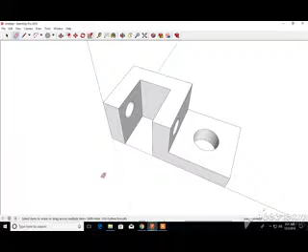So getting started with a new file here. We zoom in and are going to create a rectangle.

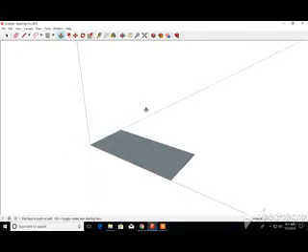The rectangle is going to be 3.75 by 1.75. There's the basic dimensions of it here. We need to give it some height, 1.5. And so there's the cube.

Now I'm going to start over here on the left-hand side. There's this U-shaped channel. The first thing I need to know is how far this distance to the edge is from the left, and I see it's 1, 2, 3, 4 halves, which is 2 inches. And I see each leg of the U-shape is a 1/2 inch.

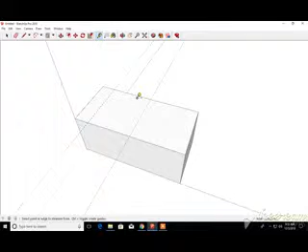So starting the tape measure tool, over 2 inches. Each leg of the U is a 1/2 inch. I'm going to take a rectangle, and I'm going to push-pull this to subtract it away.

Now, before I get too much further here, I need to take a look at the base pad. I need to note its thickness here. It's a 1/2 inch thick.

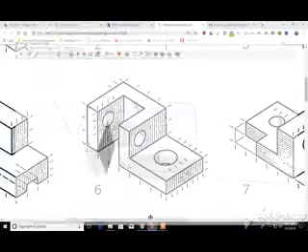So I'm going to go back to my modeler. I'm going to take the tape measure tool and drag this up a 1/2 inch. Now I'm going to divide this face here, and push-pull this downward to this line right here. It should be a 1/2 inch thick.

So there's the basic shape of the object. Now what we have to do is start putting the holes in. The holes follow a very similar pattern to what some of our other shapes are. We can see that it's a 1/4 inch from each edge, so that means the hole center is a 1/2 inch in.

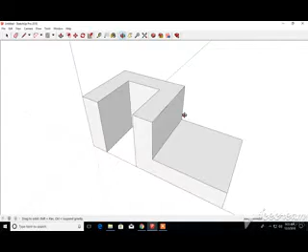So I'm going to take a guideline tool once again, measure in a 1/2 inch, and do the same from the front edge toward the back. Then right where those intersect there, I'm going to create a circle that's exactly a 1/2 inch in diameter, so 0.25 radius. Alright, we're going to do a little different technique here.

We're going to copy this. So I'm going to take the select tool, select the circle, and click the move tool. Once I click the move tool, watch the cursor up here in the corner. I'm going to click the control key with my finger and see how the little plus sign appears.

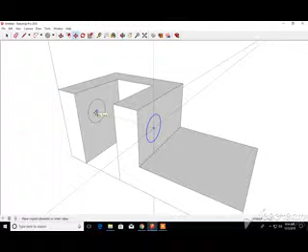That tells me it's going to copy. So now I'm going to give a reference point for the copy by clicking in the center of the circle and then moving it over to this edge here. Note the red axis line tells me it's exactly in the same position, and I give it one last click. Now once I have that, I can go ahead and subtract these circles away just like I would normally. So that's just a little time saver right there.

Alright, clean up the guidelines. Now the other hole in the base pad is 3/4 of an inch in diameter and it's centered. I know this because I could just do the math on this, and I see that it's centered on this surface.

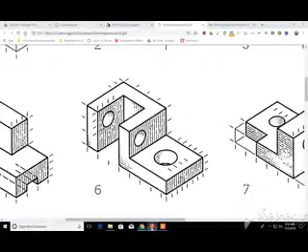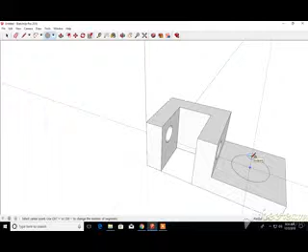So I think what I'll do is just go ahead and take the guideline here and measure over to the midpoint, and do the same thing here. Then right where that intersects, I'm going to create a circle, and the circle's radius is going to be 0.375, because half of 3/4 of an inch is 3/8 of an inch, which is 0.375. And then I'm just going to subtract it.

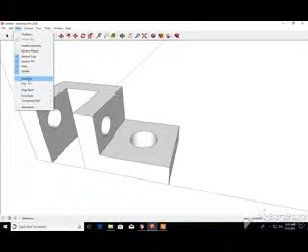Oops, there we go. Alright, clean up my guidelines, and I'm going to turn on back edges, and also turn on hidden geometry. Alright, make sure and save your file there.